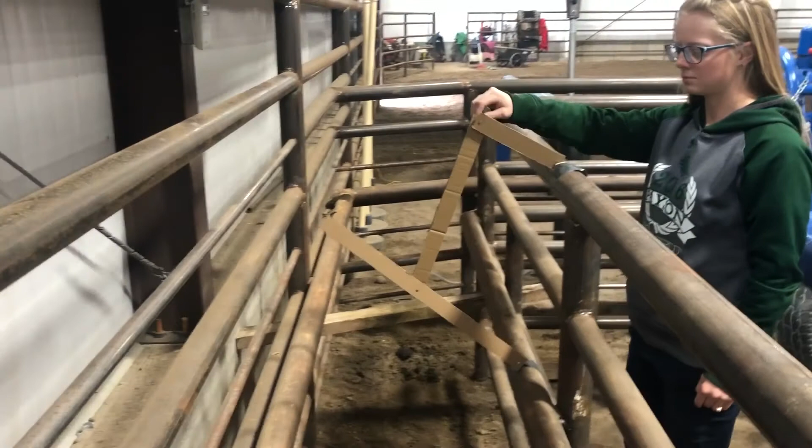And so the current solution that's been employed is a piece of wood shoved between the slats, which works, but it's kind of dumb. So we're doing it this way now. This is the linkage I designed, and it will go down, and I'm going to install a handle on that piece that's being moved, the upper link, but that is how it will be attached. And yeah, that's about it.

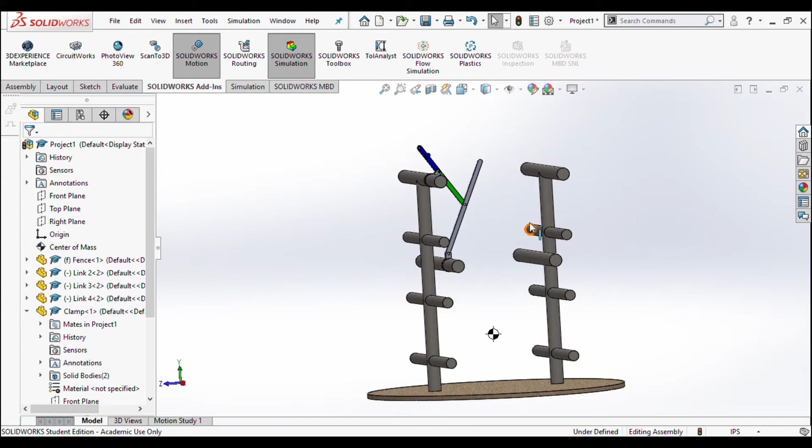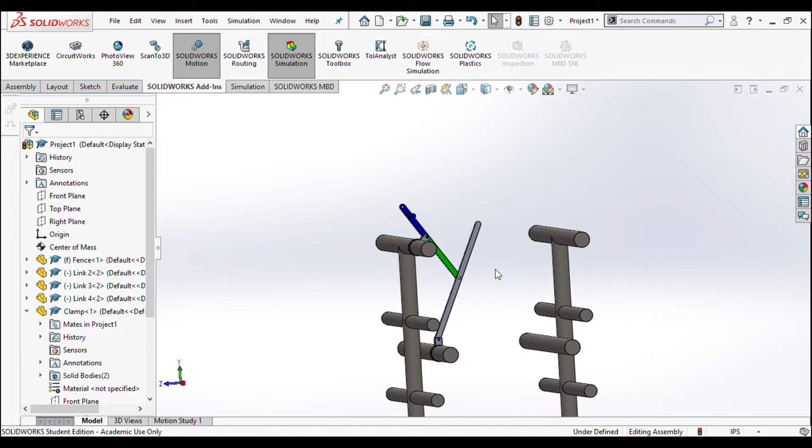Alright, so now that you've seen the final prototype, I'm going to walk a little bit through the design process that I had to go through. So this is the second iteration that I had. The first one was literally just some lines that were sketched. So in this model, I just used an arbitrary geometry for the links, kind of to verify that they would fit and work. I also got a little bit of a higher quality model for the fence, and then I colored the links to kind of help differentiate which one's which.

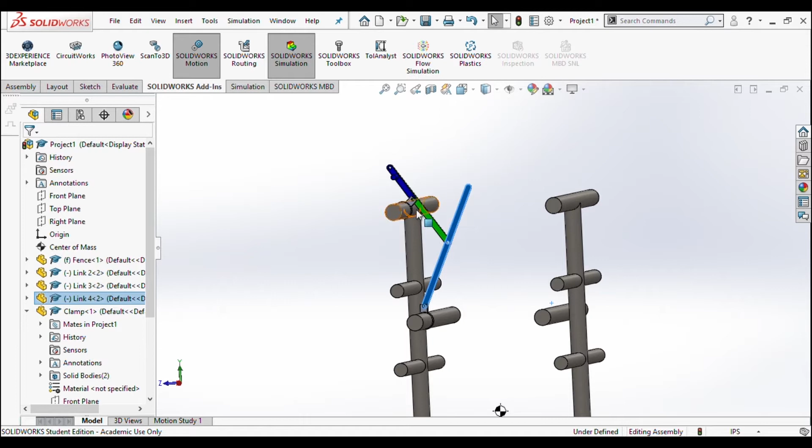So this would be in the open position, and then as this comes down, this would be in the closed position. One thing that was different between this iteration and the first is the first had the coupler link attached to the rocker at the very end, which caused the input link to be really long, which would be a little bit cumbersome for operation. So by moving that attachment point to the middle of this link, I was able to shorten both of those links and make the overall linkage lighter and a little easier to operate.

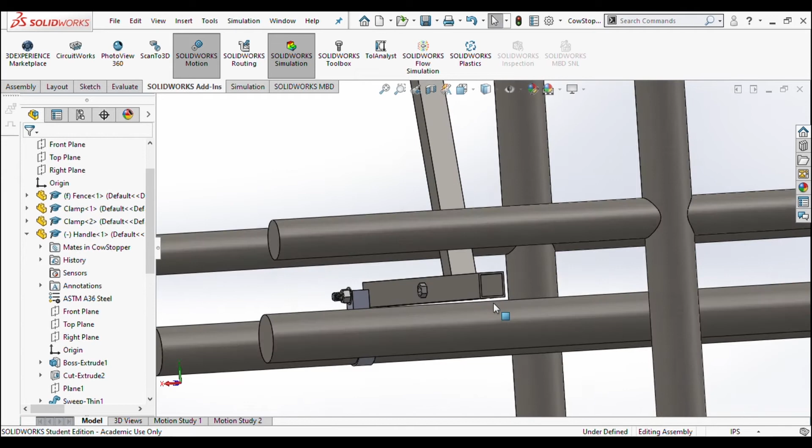I added a handle here, but as you'll see in my next iteration, that handle actually changes a little bit. So let's jump to that now. So this is the final iteration, which I modeled to be made out of square tubing and bolted together with just standard 1/2-inch bolts. I've also modeled a tubular handle here.

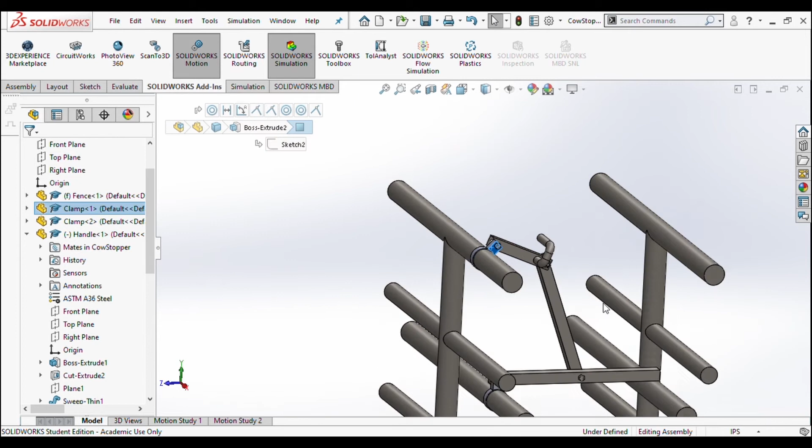This was important, especially because I discovered that the mounting brackets that I'm kind of still in the design phase on for these wouldn't have been tall enough to handle the square corner that this square tubing would create. So I had to make those a little bit taller to ensure that they wouldn't contact each other. The overall motion is essentially the same. This handle will make it significantly easier to operate than the other handle that I had.

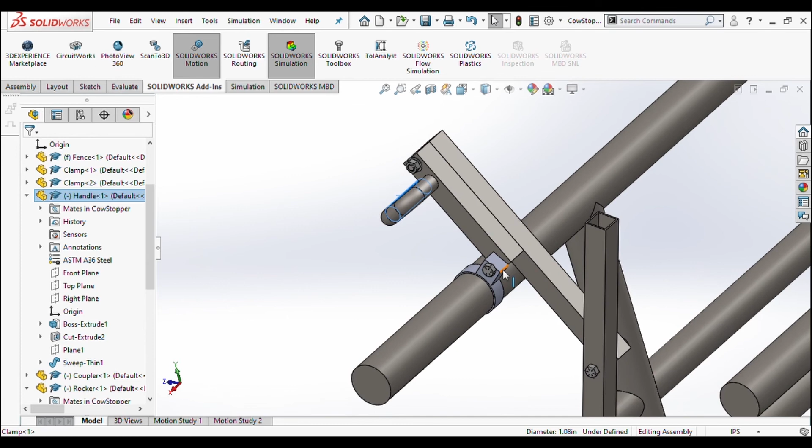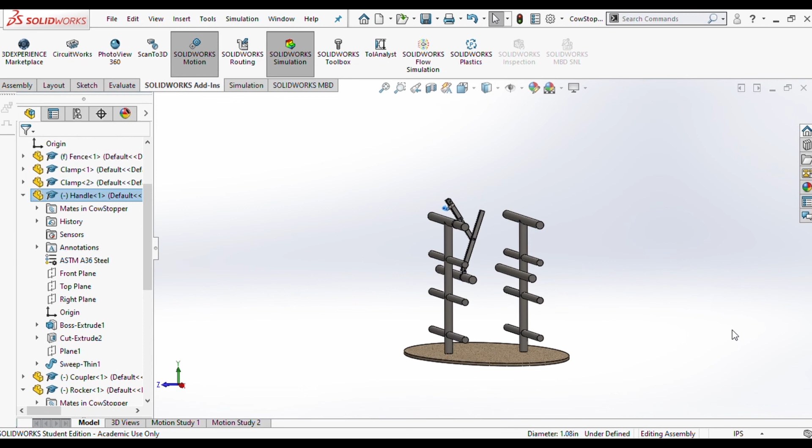Another design consideration, especially with this bolt here, it's going to have to be a shorter bolt. It won't be able to pass all the way through, so that's something I either need to change or something that's going to just have to work like that because these two sit really close to each other. Either that or I'll have to provide additional clearance here. All in all, that's the extent of this project here. That's really the motion that it's going to be completing.